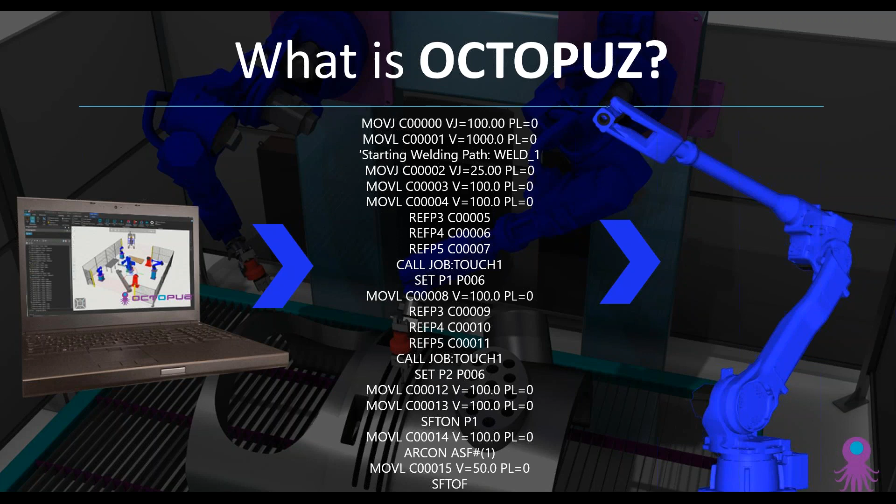Many companies choose Octopuz because of the extensive library of pre-configured components, local support, and the ability to simulate and create code for multiple robots interacting in a single simulation. The amount of time and money that can be saved by avoiding manual robot teaching is substantial.

I will now get into the software and show you the extensive catalog of Yaskawa Motoman components, how easy it is to assemble robotic systems, and finally really dive into the welding functionality available in the software.

As you can see on my screen here, I have now opened the Octopuz software. On the left is our e-catalog of components. This catalog is a web-based catalog that's constantly being updated, so all of these components are being readily developed by our application team as Yaskawa Motoman comes out with new components.

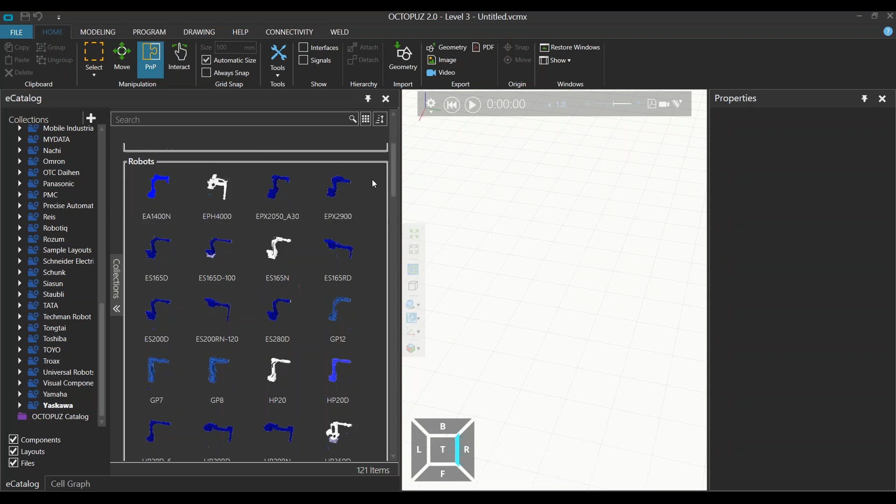As you can see, there's robot positioner gantry systems, a variety of robots from welding to material handling, pick and place, as well as collaborative robots, and workpiece positioners varying from headstock tailstocks, tilt-turn positioners, as well as skyhook positioners.

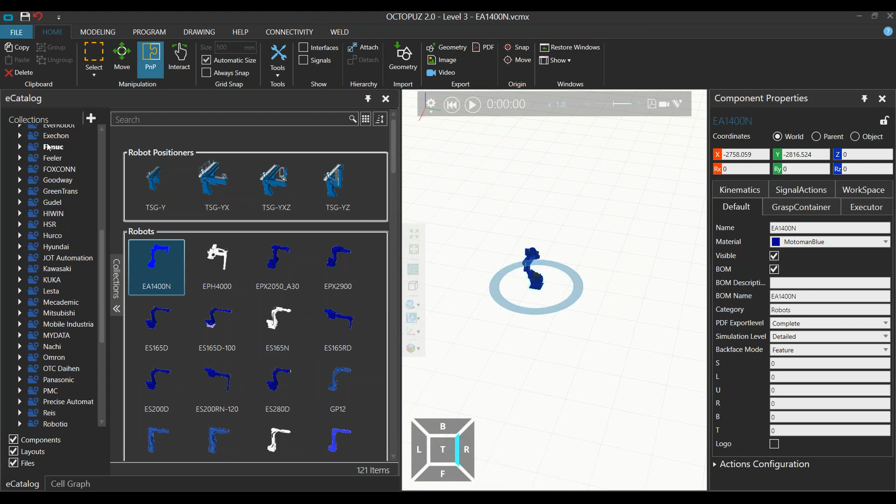So I'll very quickly bring in an EA1400N and attach a torch to it so that you can see how we attach components in our software. Now once you drag components out of the catalog, they come in with all of the correct characteristics. So if I interact with my Motoman robot, it will stop at all the correct joint limits and will interact the way that it would in real life.

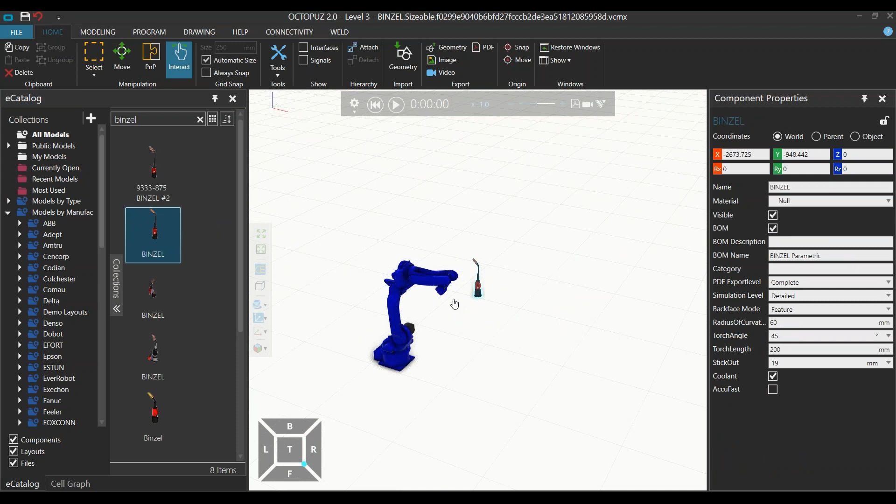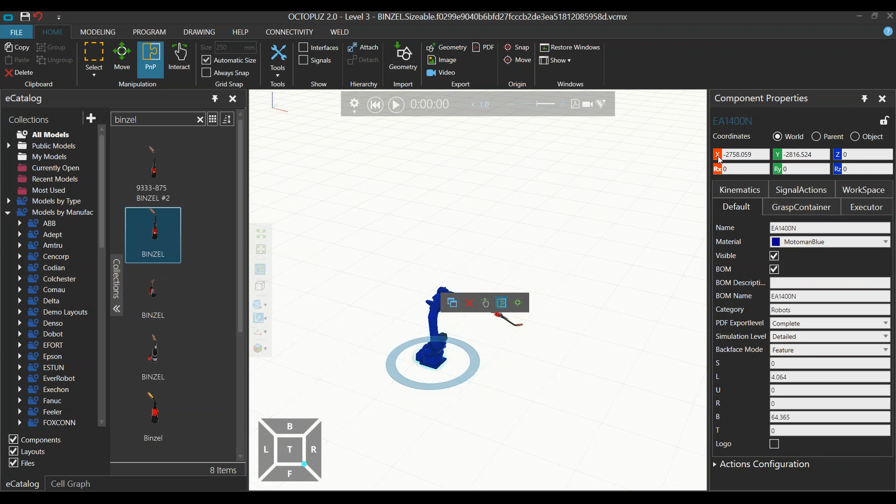If I wanted to connect my torch to my robot, I simply drag it close and it snaps to the end of the arm. Now as you can see, this is a very powerful tool to assemble components. I can also move my components around in the simulation in an XYZ coordinate system and rotate about those axes as well. And this can help me lay out an entire system, including positioners, walls, and a variety of different cell components.

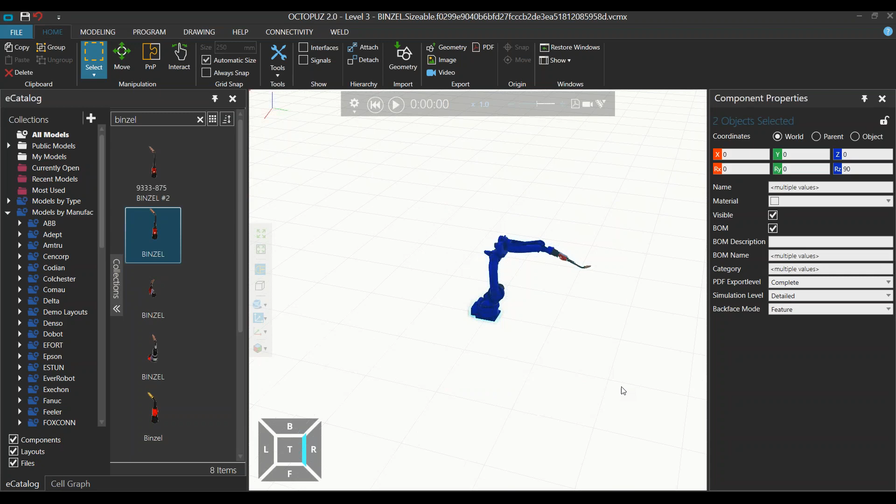So now I'll bring in a cell that we have created for a customer, and I'll go through some of the welding functionality.

All of our welding functionality is housed in this Weld tab. In here, you can do anything from collision detection to singularity, speed, acceleration checks, as well as posting the actual welding code. So what I'll do is I'll start by creating a home position.

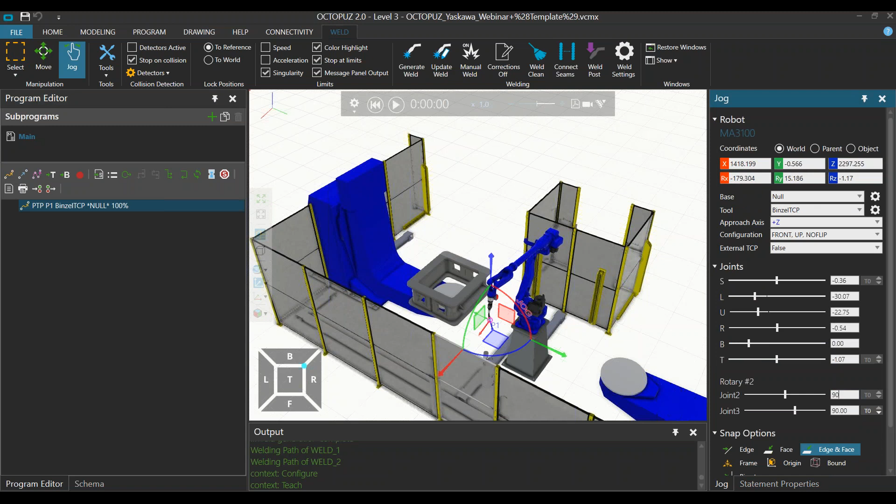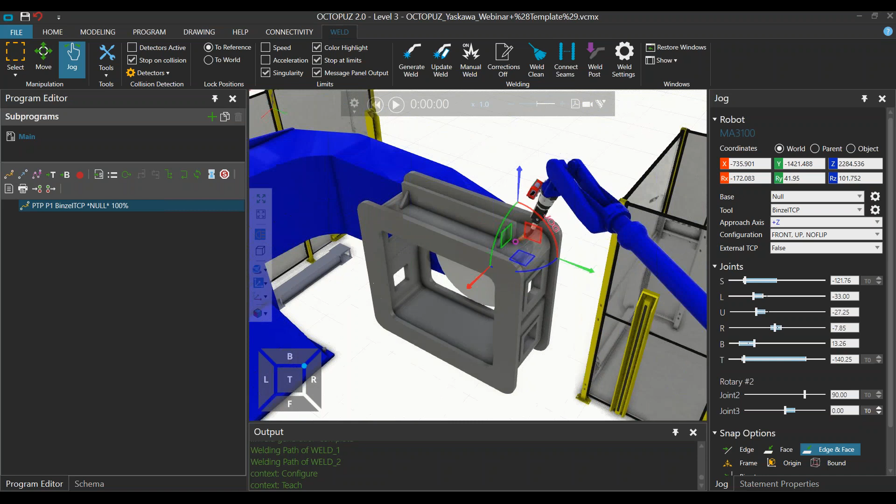I will now index the positioner so that I can access the seam that I would like to weld, and I'll drag my robot over to my component using the purple circle. This allows me to snap to geometries, and then I can grab my blue arc and rotate my torch, and grab the blue arrow and move in the Z direction, and the green arrow to move in the Y direction. And I will use this as a clear position.

Now to generate welds, I simply start the generate weld function, and this will bring up our welding functionality. All of our welding features or parameters would be housed in here, anything from stitch welding, touch sensing, multi-pass welding, or coordinated motion. We can also save and load recipes, and I will load the recipe for my first weld.

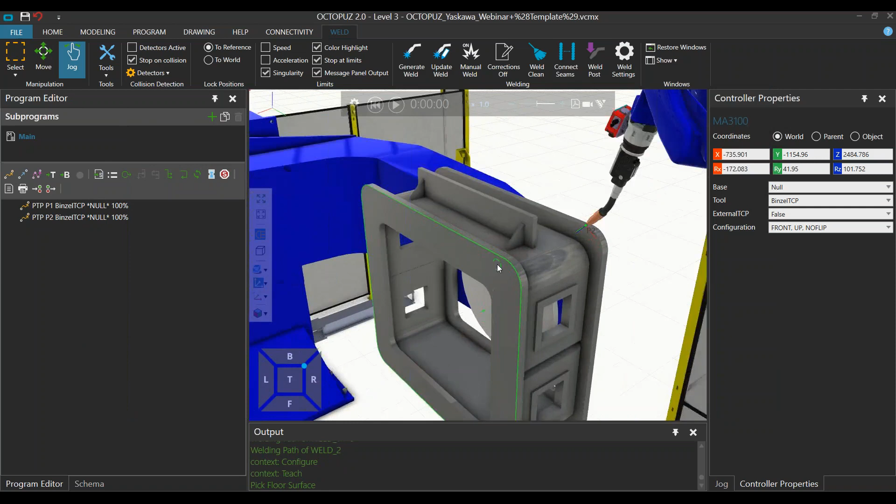So I'm going to create the weld now, and in our software we'll be prompted to select a floor surface as well as a wall surface for our weld seam.

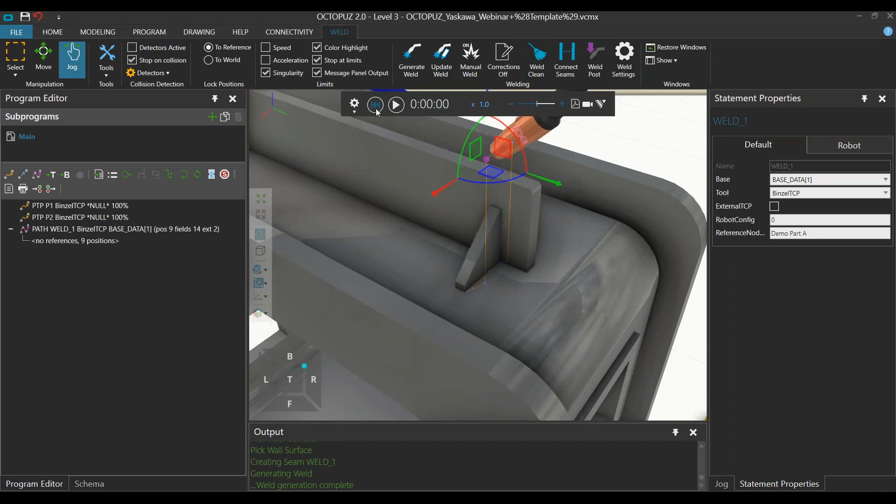As you can see, the software has created an approach as well as a departure move and the variety of clear moves in between. If I simulate through, you can see that the robot's going to move in, weld the seam, and automatically flare into the corner to avoid a collision with the wall.

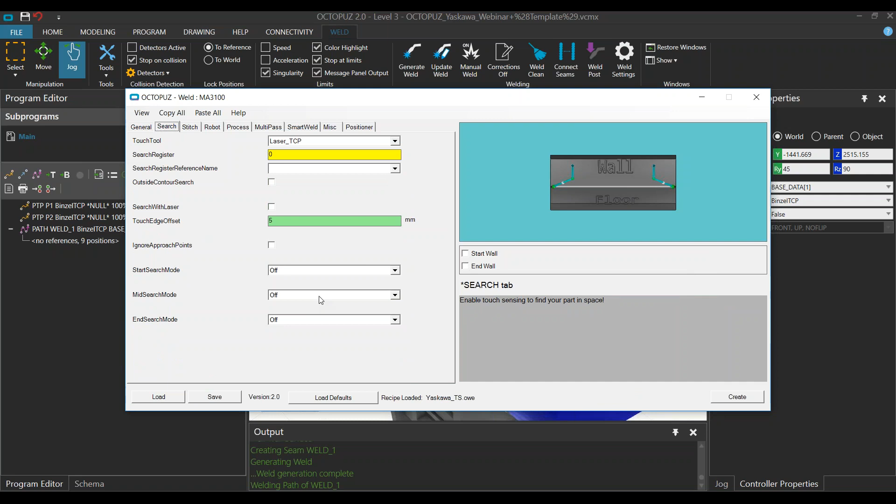Now from here, I'm going to create a weld using laser touch sensing using the AccuFast laser. So I will load my touch sense recipe. In my search tab, I will turn on a 2-point touch at the beginning and a 2-point touch at the end, and again I'm going to select my floor and my wall.

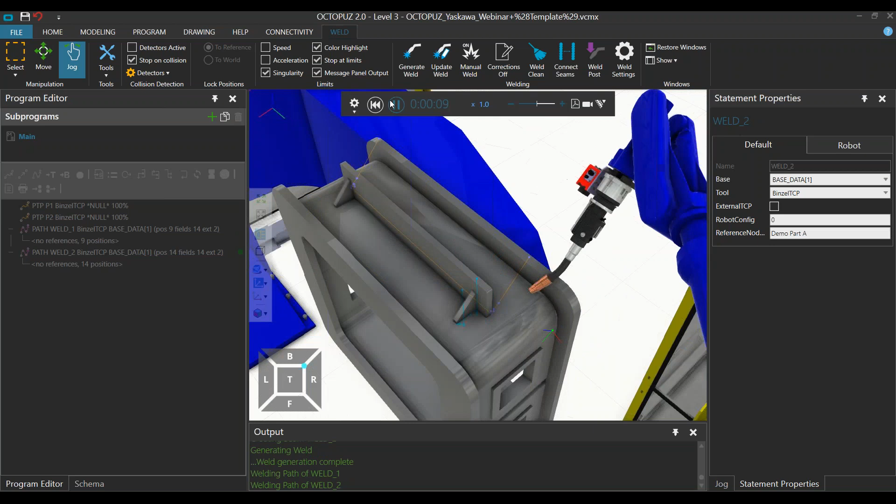And if we simulate through, it's going to weld the first seam and it's going to use my laser tool center point that I didn't turn on. So I'm just going to send my output to the laser to turn the laser on, and then send an output after to turn the laser off.

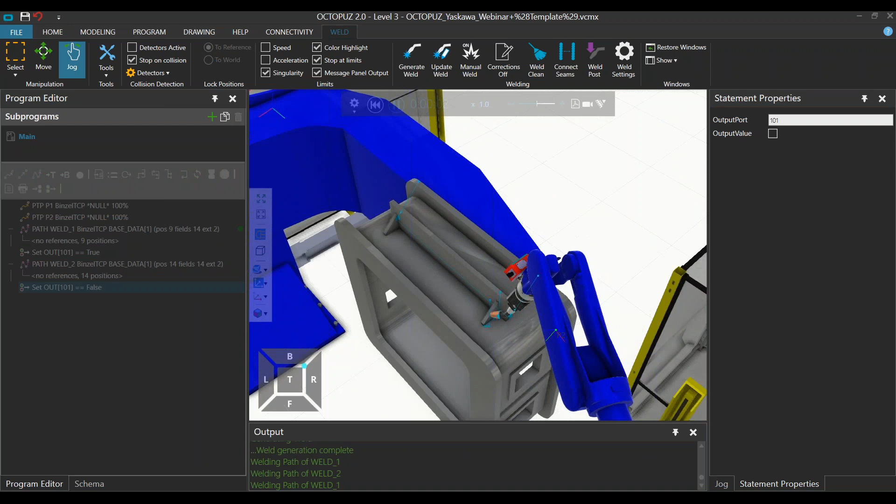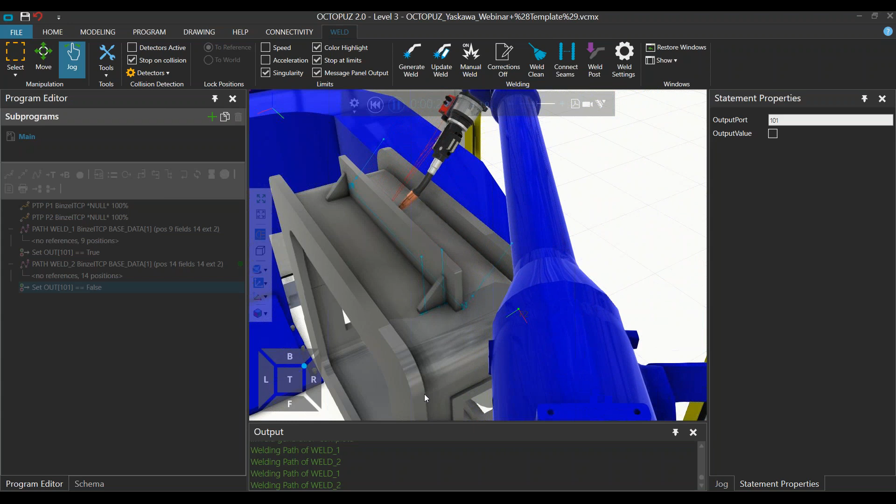Now it'll use the laser for the 2-point touch sense, return to the beginning of the seam, and weld the seam using my correct tool center point.

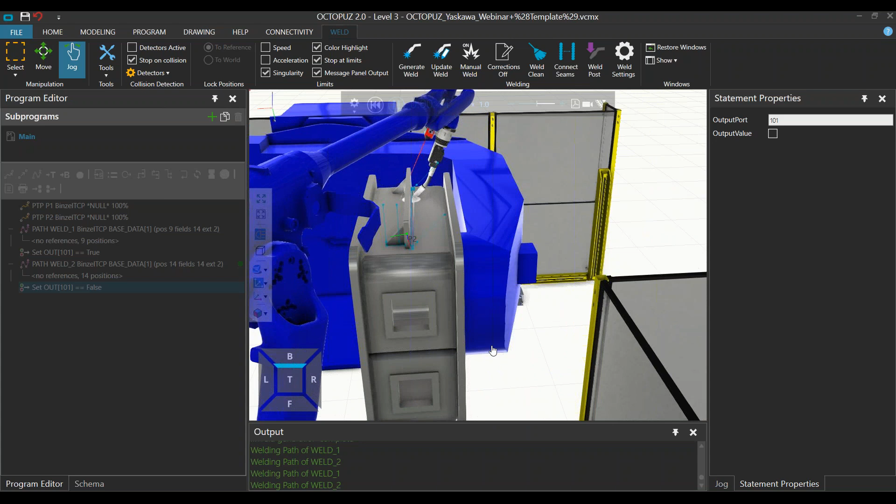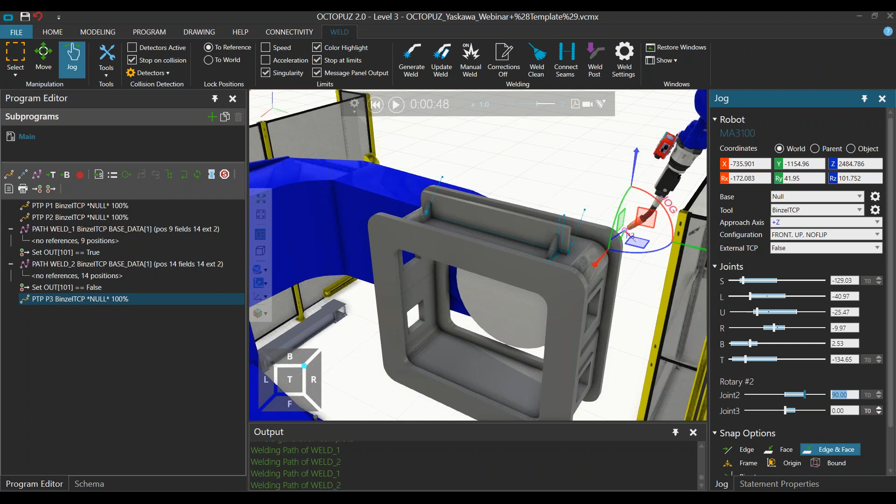Now from here, I'm going to copy my first clear move and drag it down to where I would like it in my program editor. I'm going to rotate my positioner to 90 degrees so that I can access the next seam that I would like to weld and create another point.

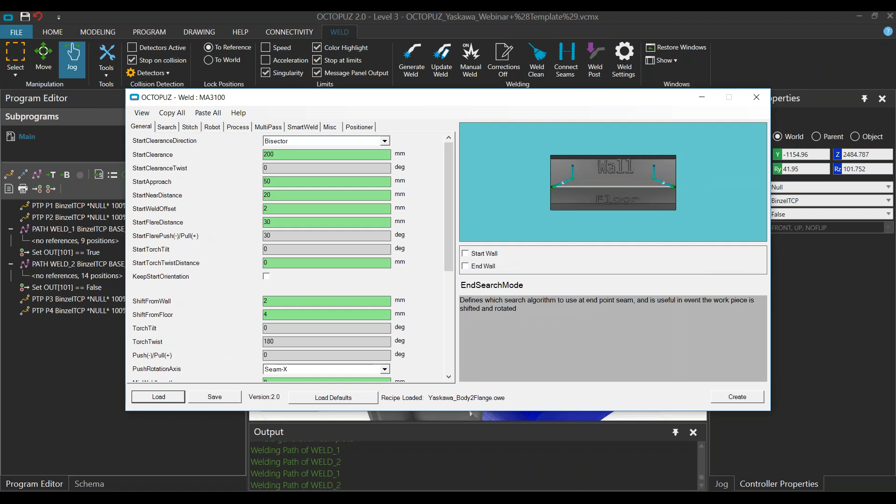From here, I'm going to use my positioner to weld around this seam. So I'll open up my generate weld again, load my recipe for my body to flange, and I'm going to turn on Smart Weld, which allows me to weld around corners. With my positioner, I'm going to set it to width bisector. Now again, I'll select my floor and the wall of my seam, and the robot will create that motion.

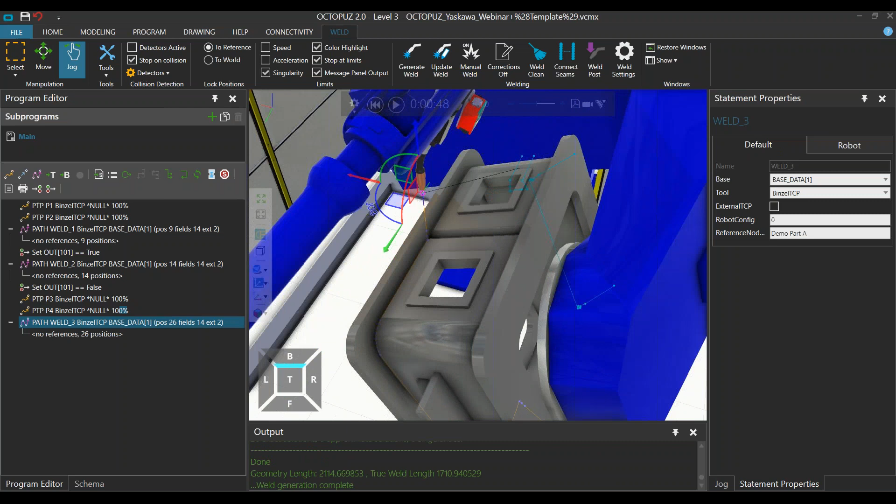If I wanted to walk through to make sure that my robot is going to follow the correct seam that I would like to use, I can walk through each individual point and see that the robot is moving around the corner, as well as using the positioner to position the component.

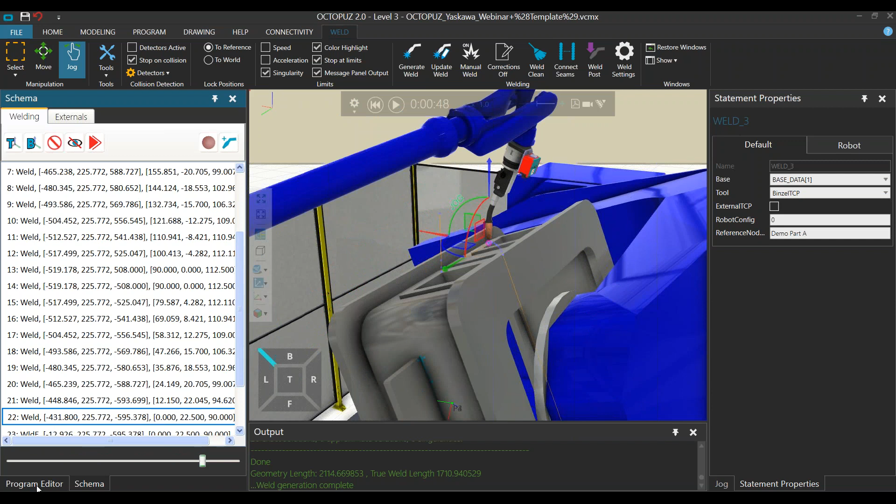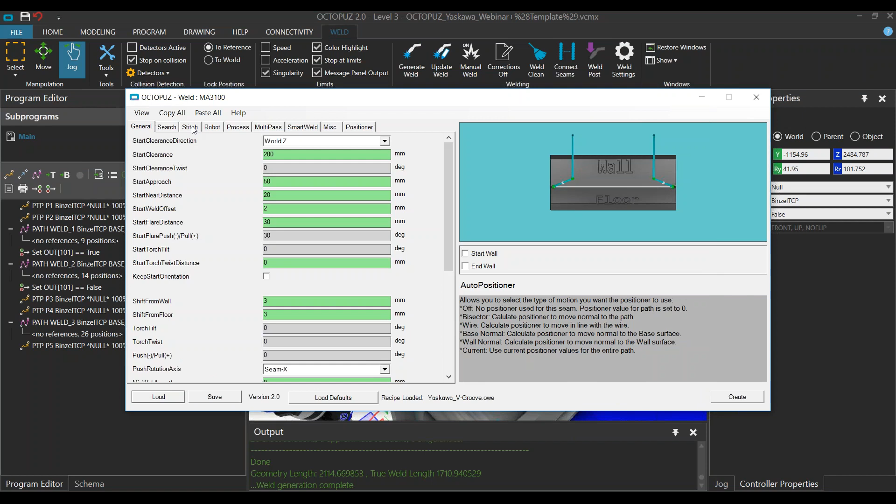After returning to the top, I will now do a V-groove weld using through-arc seam tracking. I'll load that recipe and go to my Process tab and turn on seam tracking, again selecting the floor and the wall of my seam.

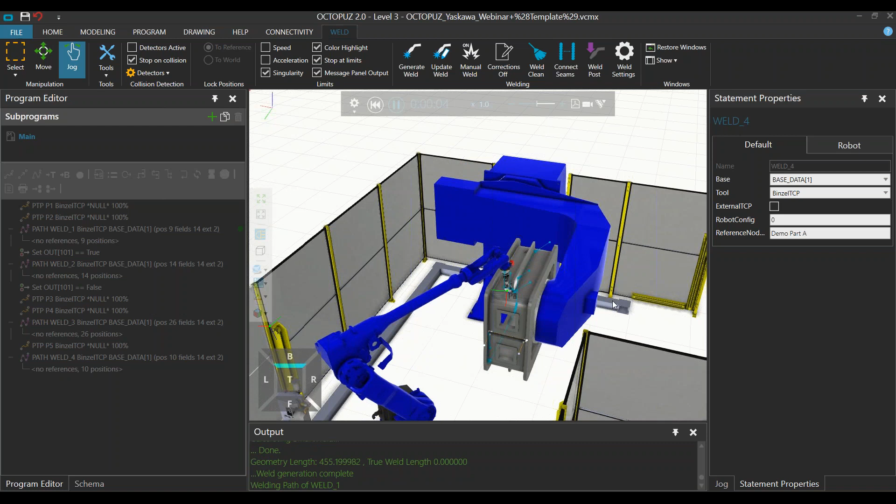And now I'll simulate through the entire process. So the robot will come in, weld the first gusset weld, move around to do the 2-point touch sense, and weld our seam.

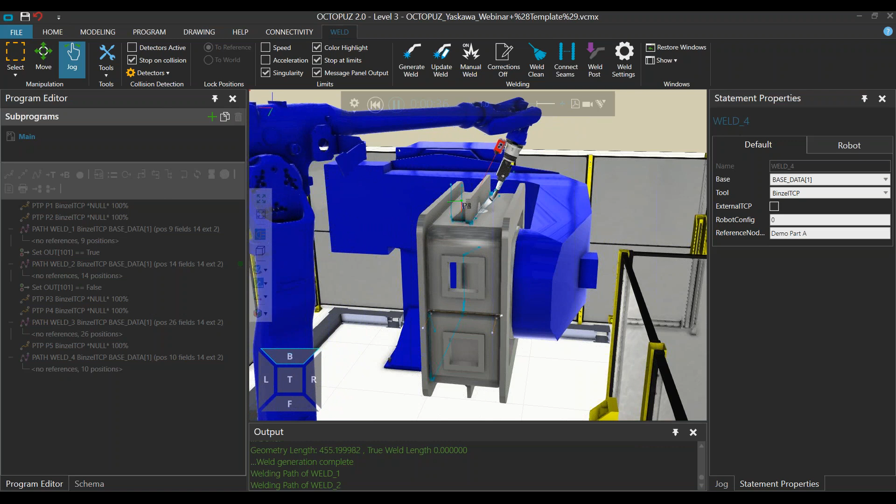Rotate into our 1G welding position, and use my positioner to maintain that orientation.

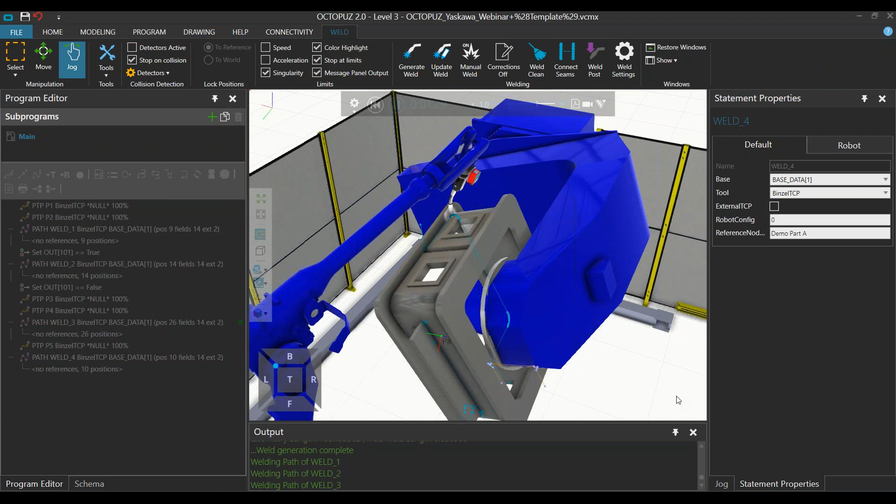And finally, use ComArc through-arc seam tracking to weld my V-groove. As you can see, the weave itself for seam tracking is simulated, so you can accurately see whether or not the nozzle is going to be in contact with the walls of your component. And again, the torch will automatically flare into the end of the seam to avoid a collision with the wall.

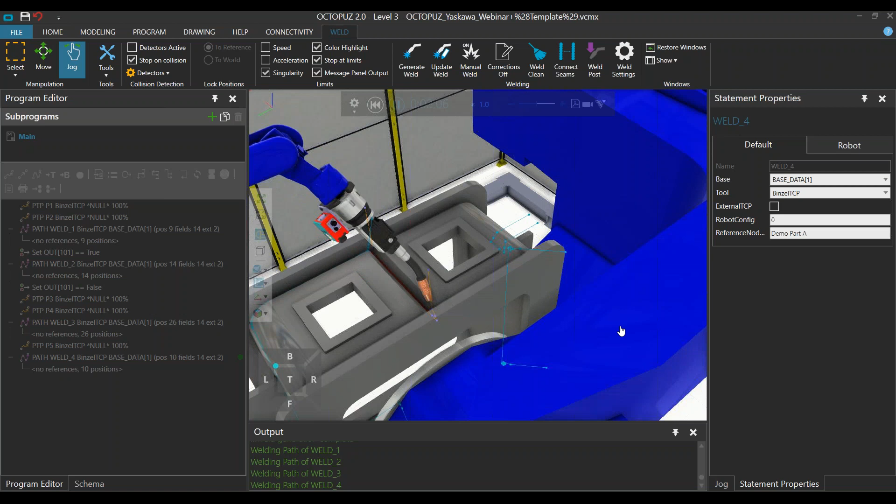I will now pass the presentation over to Will. He will talk to you about some of the seam finding and tracking options available from Yaskawa Motoman.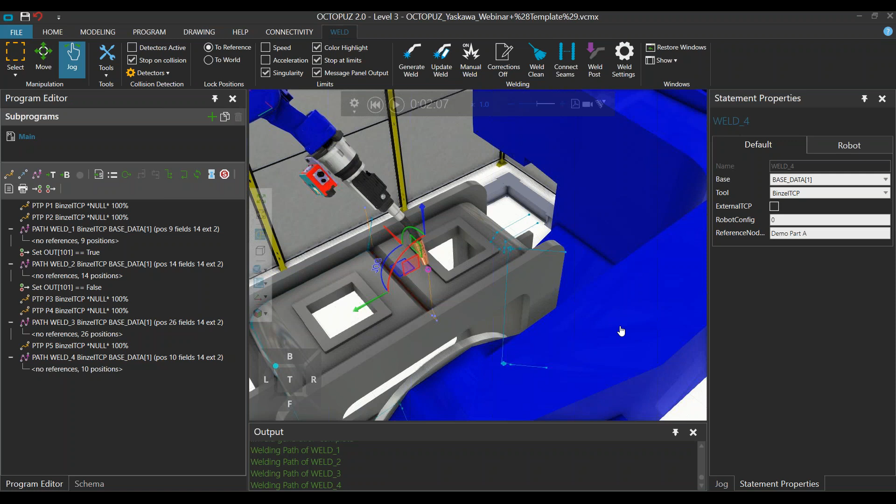As we all know, production parts are never exactly the same as the CAD or drawing. For that reason, it's important to use seam finding and tracking technologies in conjunction with offline programming to overcome the differences from the simulated environment to real production parts.

Okay, well, thank you, Tyler. As Tyler has already alluded to, there's a need to find the part that we've simulated.

Essentially, what Octopuz does is create an offline program that creates everything we need to weld out the part, but it's based on the part model, the virtual part itself. The tacked assembly that we're going to present to the robot will inevitably vary from the model to a degree that the robot won't be able to weld it out. The robot requires that the parts repeat, in essence, plus or minus 20 thou, half a mil, basically half a welding wire diameter, in order to ensure that we're going to successfully do so.

This varies from very simple touch sensing, where we're putting voltage on the wire and jogging the wire towards the part until it grounds out, voltage goes low, and we can determine where the planes of the weld are, all the way to a laser line scanner, the Moto-Eye SF, which does a quick sweep of the joint and determines its geometry and location from that sweep.

Then we'll get into seam tracking. There's two basic technologies available there. The first one, Com-Arc, as Yaskawa Motoman calls it, or across the industry known as through-the-arc seam tracking, where we're taking advantage of constant voltage welding phenomenon to track the joint.

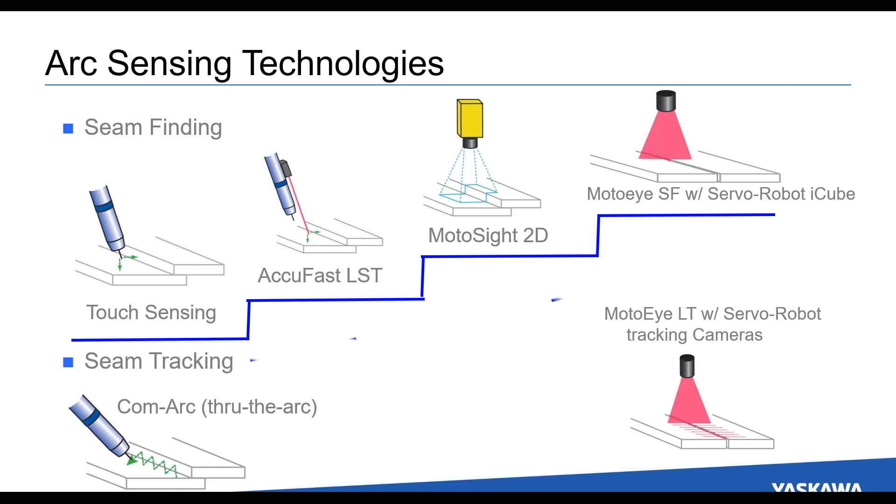So seam finding, we've lumped both touch sensing and what we call AccuFast onto one slide. From the robot's perspective, these are identical in terms of the communication, the I/O required to make both work. It's the sensing technology itself, the transducer, that changes between the two.

Touch sensing has been around for decades. It's a very, very simple, robust process. What we do is we position the robot above, adjacent to the part. We send a signal to the welding system to turn on its touch sensing mode.

All of your modern welding packages, be they from Miller, Lincoln, Fronius, ESAB, whomever, will have a touch sensing circuit that we can access.

What the weld package does is put 80 volts on the MIG welding wire, and now we can jog that wire towards the part. When we make ground, we see the voltage go low, and we found the horizontal plane, for example, in a horizontal fillet.

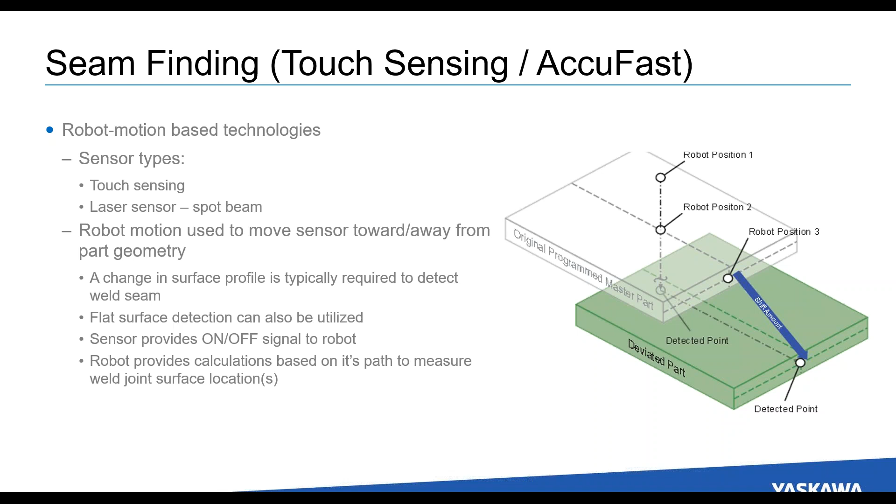We can back up to some point adjacent to the part and jog laterally till we hit the vertical leg of the weld, and interpolate where the origin of the weld is. If you were to do this at the start and finish of the weld and draw a straight line between the two points, you would have found the weld.

So a quick video here of touch sensing in action. What's going to happen here is the robot's going to come down and find the Z-axis dimension of the 12 o'clock point on the large piece of pipe, and then come over and do a couple touches on the nipple before it welds it out.

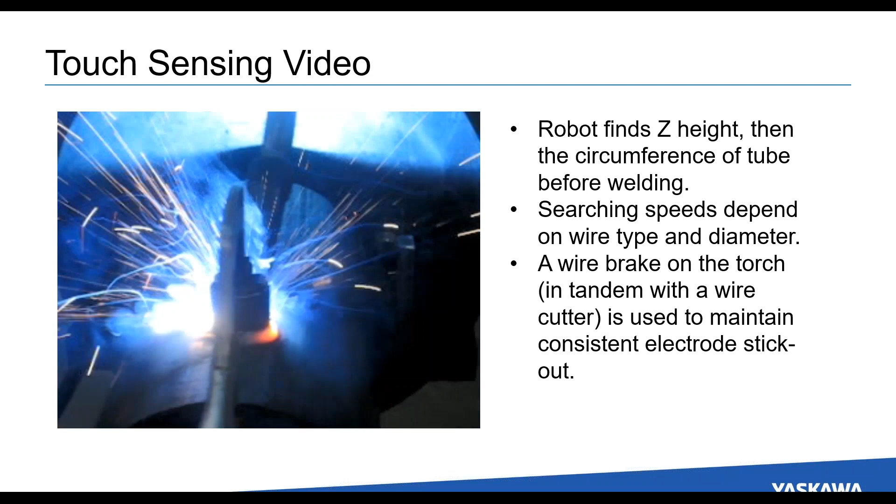So another point made on this slide is there's some hardware we have to package along with touch sensing to make it work effectively. One being what we call a wire brake, a pneumatically actuated plunger that's in the welding torch. Before we go into a touch sensing mode, we activate this brake.

What it does is it prevents the MIG wire from cycling in and out of the contact tip and moving around on us as we move the robot.

Once we've braked the wire, we go over to what's called a wire cutter and clip the wire to a known stick-out. So the distance from the end of the contact tip to the end of the wire is known, and with that, we can do reliable touch sensing routines.

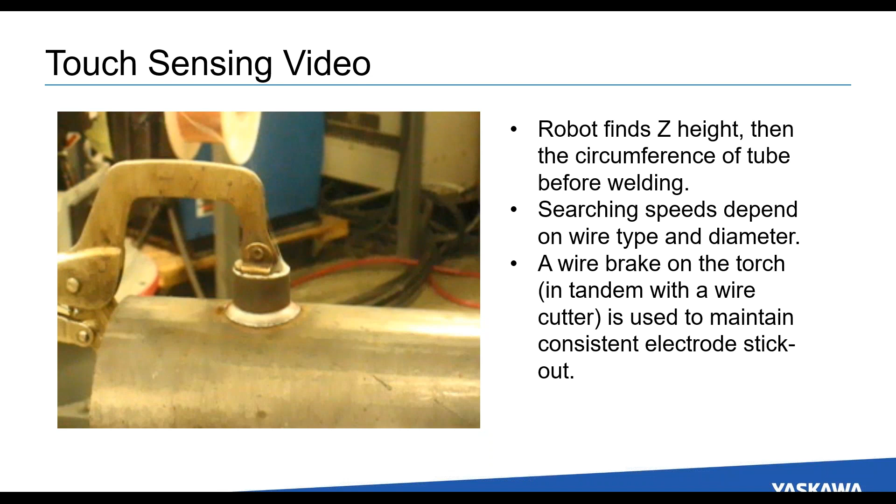So AccuFast, again, from a control standpoint, is the same thing as touch sensing. What changes here is the transducer, the way in which we're finding the surface of the part. Here we've gotten rid of using the weld wire with voltage on it and replaced it with a spot laser. We set up a predetermined focal length.

Again, we jog the robot from a nominal position above the part towards the part. When the focal length is met, we can see that signal go high, and we know that we found the plane of the weld.

So we do that for both a horizontal and vertical leg in the case of a fillet or a lap weld, and carry on the same way we would with touch sensing.

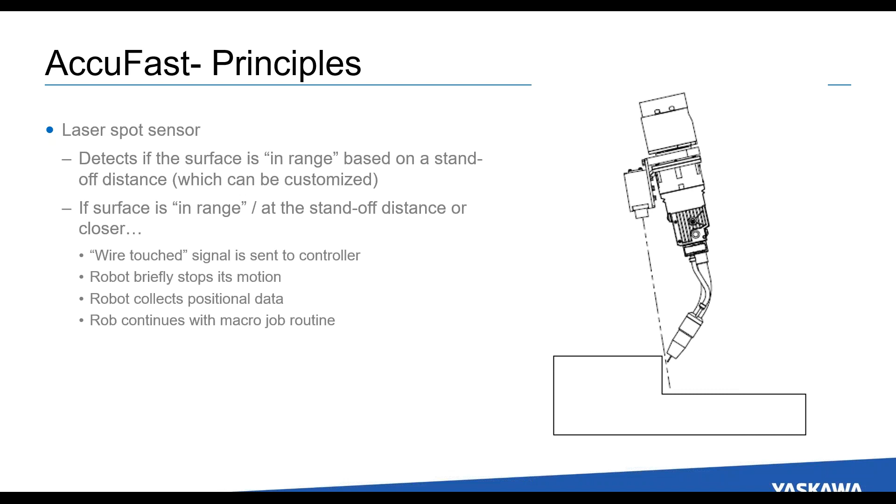So the hardware involved here is the whole thing is based upon a Keyence spot laser. We put it in a hardened enclosure with a pneumatically actuated flapper that we can close to protect the emitter and receiver of the laser while we're welding, keeping all the soot and spatter and whatnot off of it.

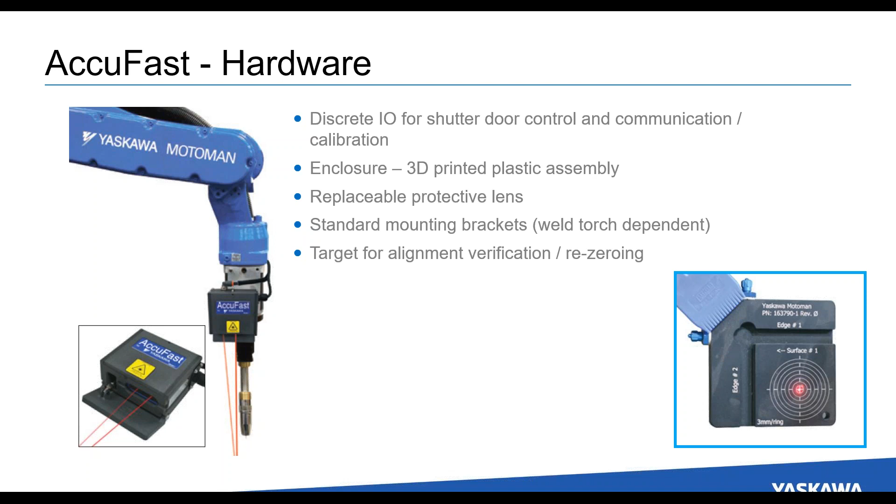Quick video of AccuFast at work. You're going to see two things happening here. The robot is first going to scan the back edge of the part and the left edge of the part. The part has not been fixtured to the table it's sitting on; it's been placed nominally, so the robot's going to do a sort of macro location of where the part is at.

And then it will do a function we call relative job, where it will shift and rotate all the points in its program to match this revised position. Then the robot will swing around and do an AccuFast tracking of the front of the part, and then do a mock weld of the part.

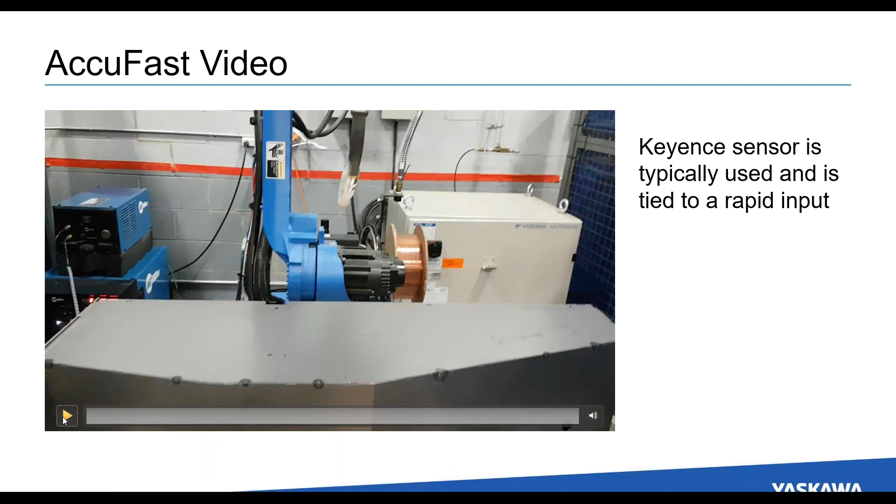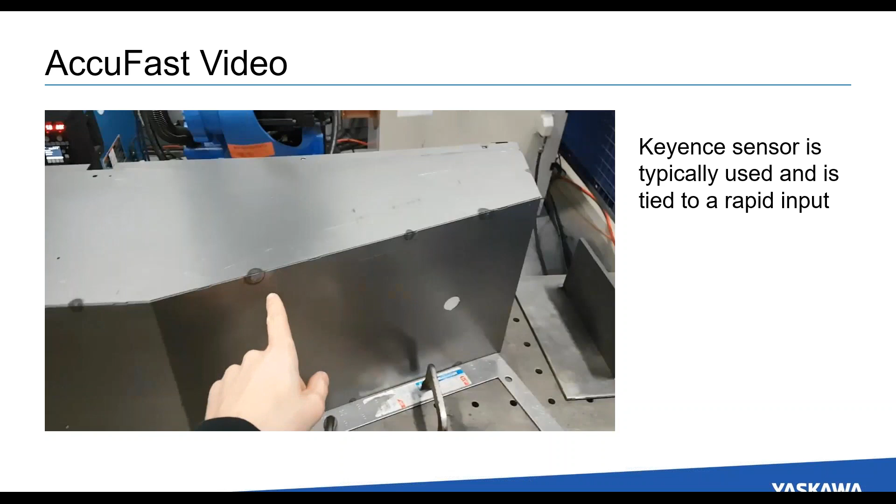This is an AccuFast demo for C&P. Going to be tracking this weld seam here. This is how the part's set up.

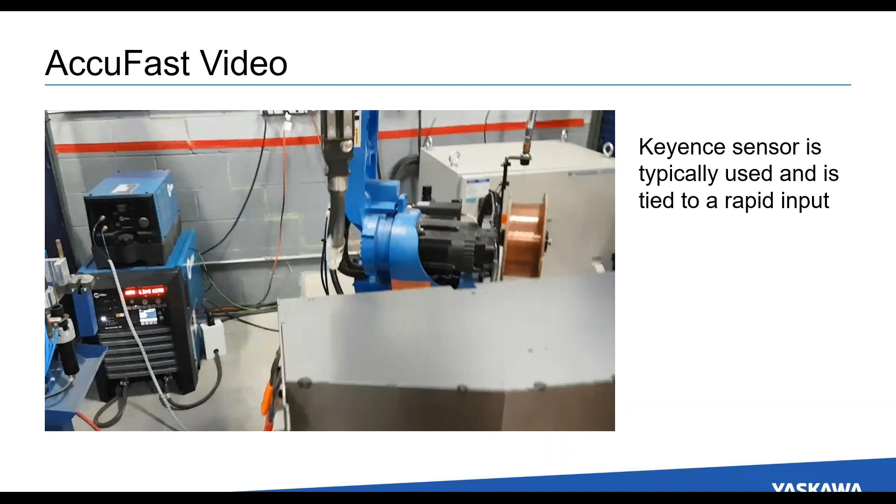The robot first finds the user frame using relative job.

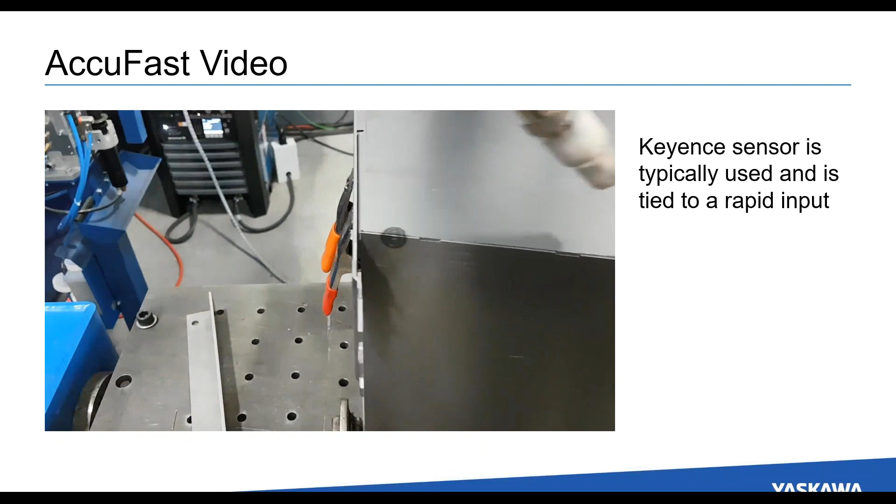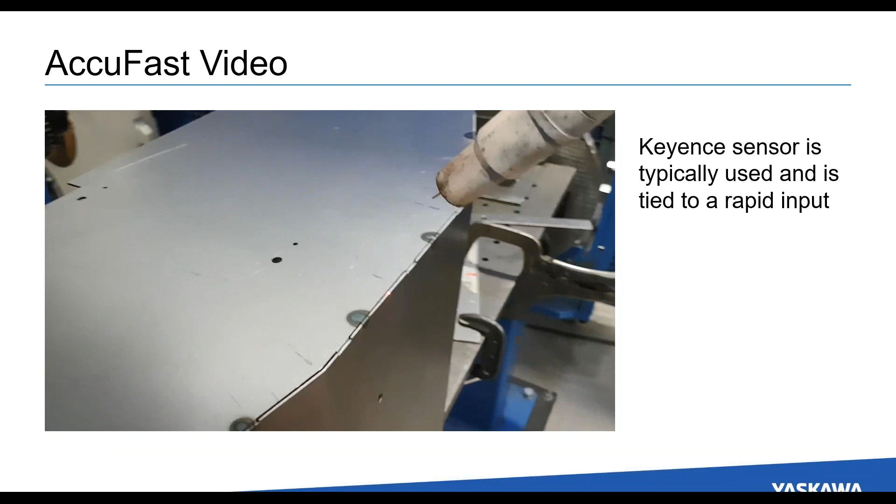Then using the edge macro to find Y. Then another edge macro to find X and Z. And then they're going to shift off of that user frame.

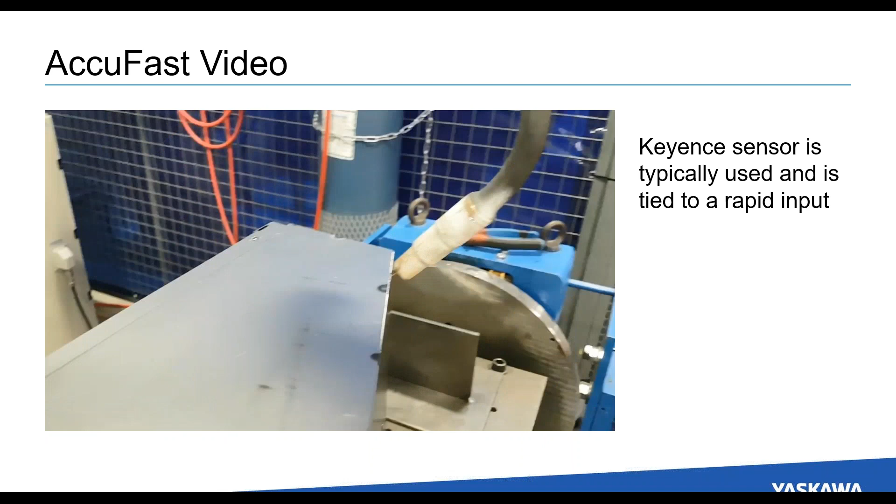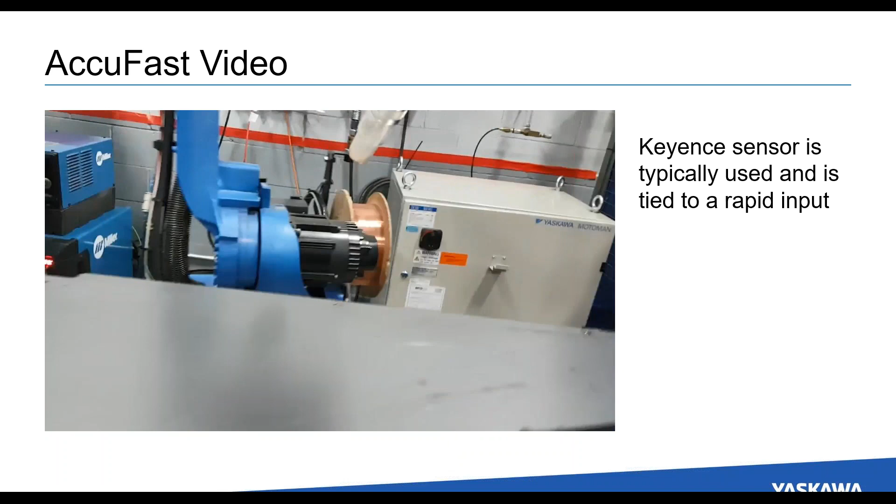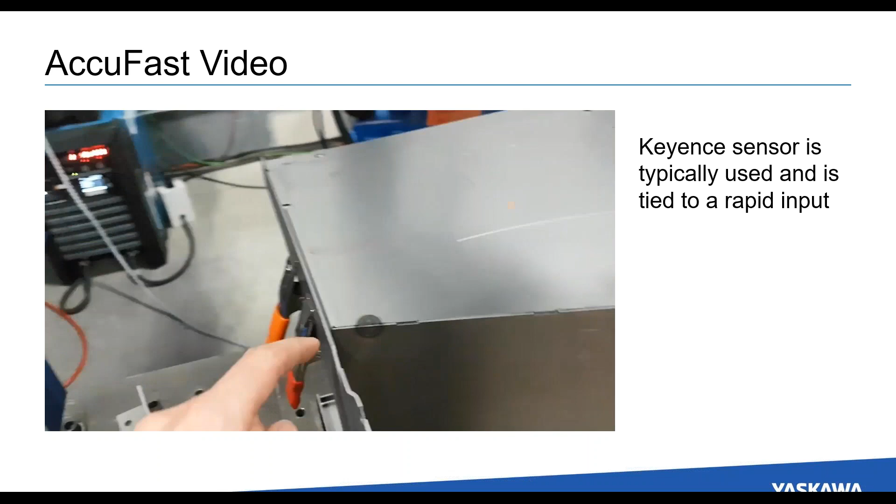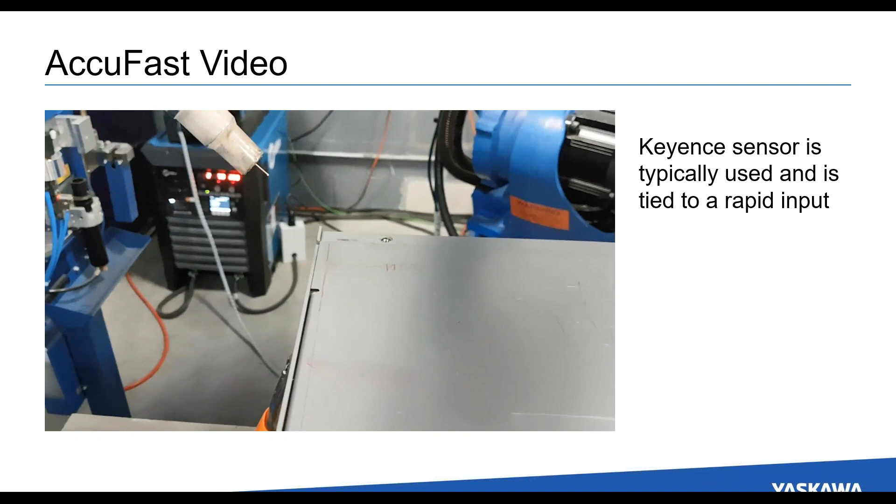Then I'm going to pause the program, and I'm going to move the part. I'm actually going to rotate it, twist it a little bit. Okay, run it again. Finding another user frame. I had to put this piece on here because I wasn't searching this bevel very well. Edge macro again, finding Y, and another one finding X and Z.

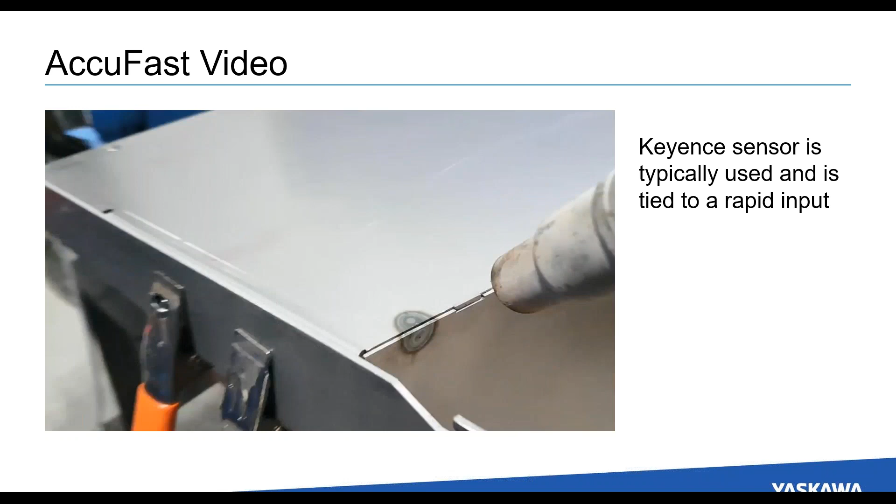Okay, so we get the idea there.

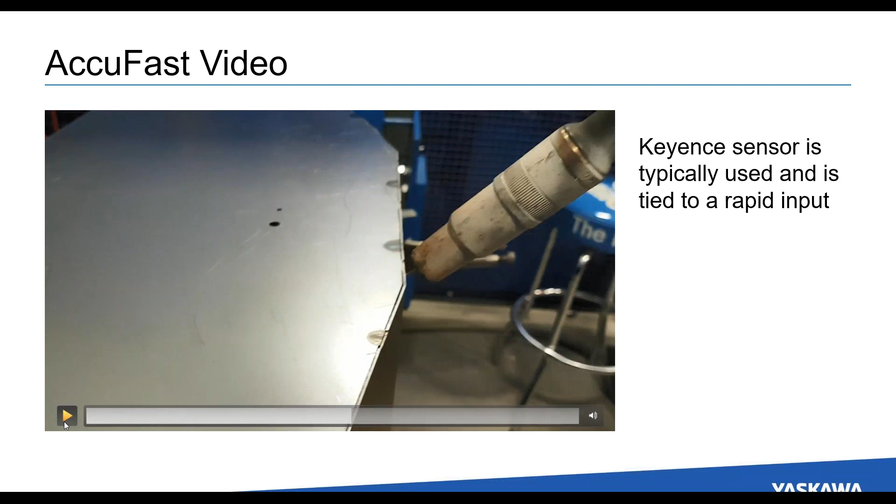So to compare the two, touch sensing, positives of that, it's a very low cost adder to the robot package. We generally charge $3,000 US for that to be added to the basic robot package. Very reliable, very easy to program. We've been doing this for decades.

Our techs understand it very well, and it's very easy to explain to our customers how to set them up. The difficulties with it is it's typically slower, one of the slower finding technologies because we have to move slowly. If we move too fast, we'll end up bending the wire, losing our tool center point, and defeating the whole purpose of doing the seam finding.

The wire clipping that's involved to cut to a known length also chews up cycle time. So AccuFast, by definition, was developed to be a faster alternative to touch sensing. So the positives of that are we no longer have to clip any wire because we're not using it.

It's very easy to program. It programs more or less the same way as touch sensing programs. We can actually do our search routines much quicker because we don't have to worry about bending a wire. We can also handle thinner material. So in a lap weld, very difficult to pick that up with touch sensing, but AccuFast has a much better chance of picking it up.

I guess the cons of it are that we would charge about $6,000 as an adder price for the AccuFast, and it can be sensitive when using super reflective, highly reflective materials, polished stainless, aluminum, whatnot.

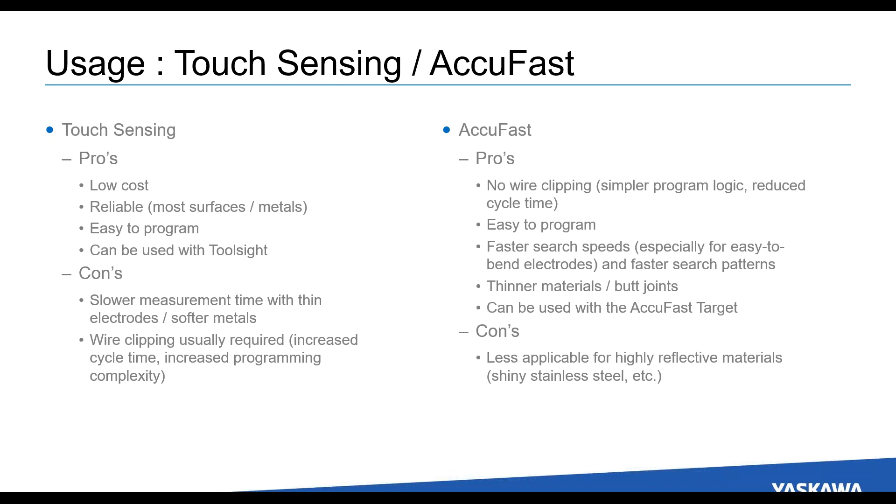MotoSight 2D. We haven't done a whole lot with this, but if we have a type of weldment where we can't pick it up through normal touch sensing, then it is possible to use a conventional two-dimensional camera, take an image, and then determine where to weld. Expanded metal is a great example of this. So the camera will be tuned to take the image and then be able to determine where we want to put our tacks on the part. Here's a quick video of that.

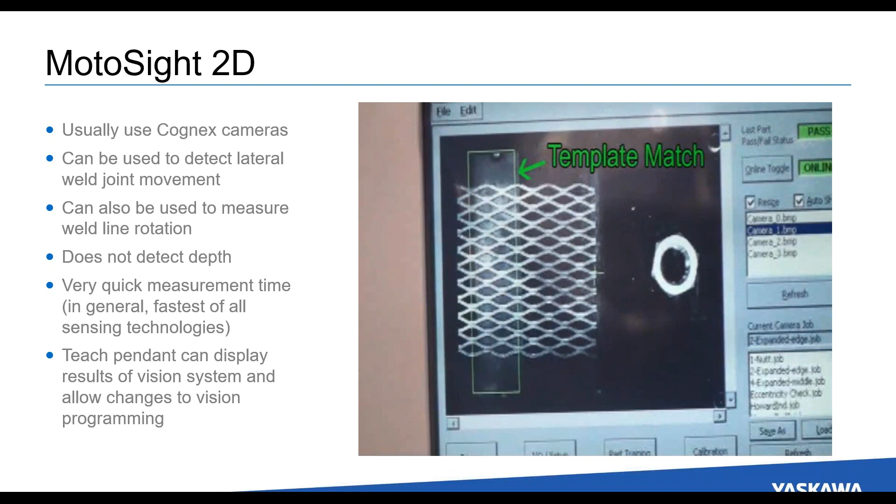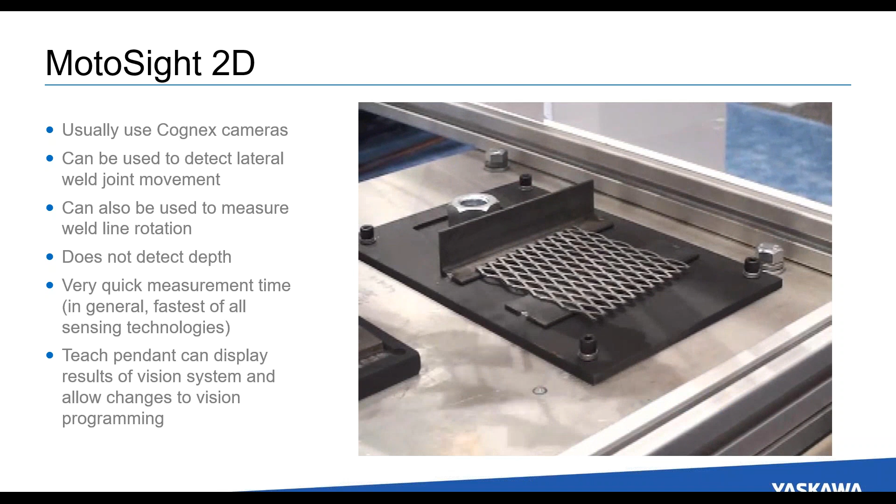Okay, the last of our seam finding technologies is from a company called Servo Robot out of Quebec. These guys are recognized as the global leader in what they do. They've been around for many decades now, developing their products. Motoeye SF, or Motoeye Seam Finder, is essentially a laser line scan.

The advantage here is that we can position the robot once over the start of the weld, perhaps once over the end of the weld, and take a quick laser line scan. It avoids having to move the robot around to actually trip a sensor to find out where the part is at. This is more capital, however. We typically charge $20,000 US to add this to the robot package. So if you can get away with your conventional touch sensing systems, that's what we usually go with.

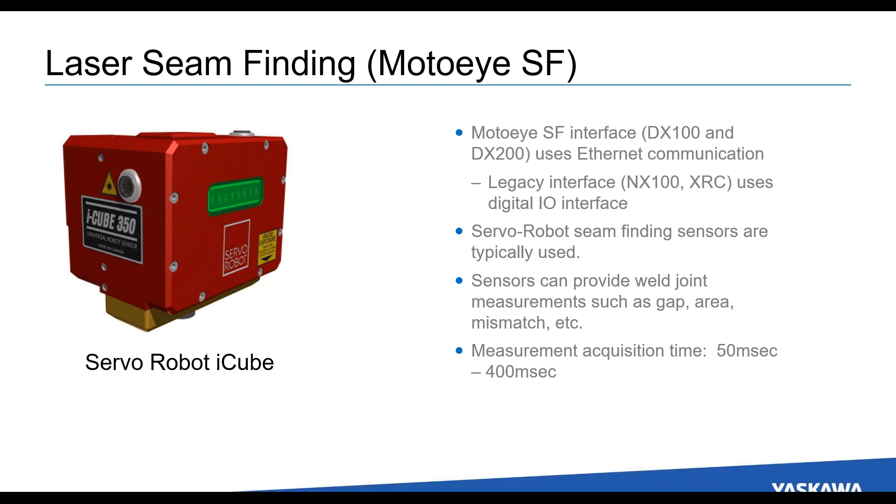The iCube is the high end of all of that. Quick video of it, there we go.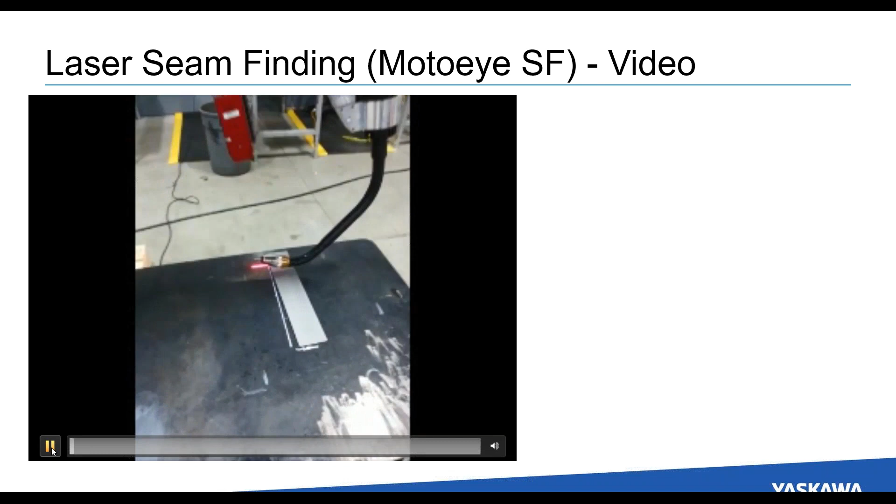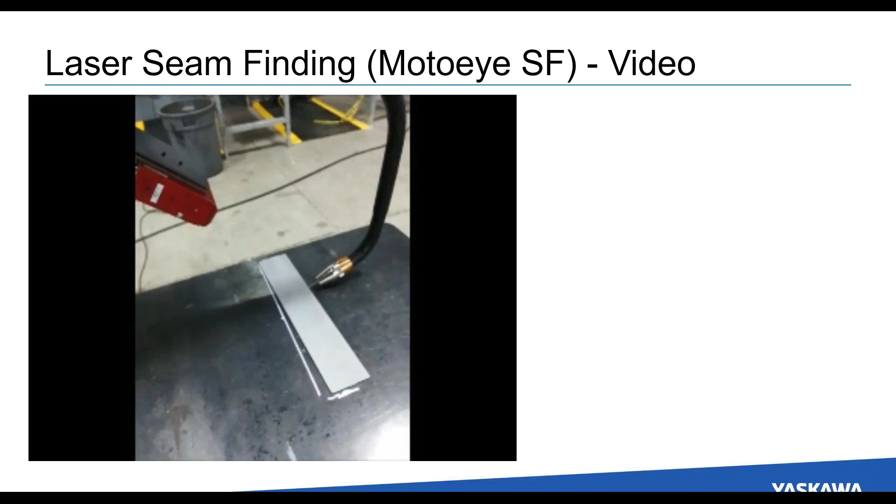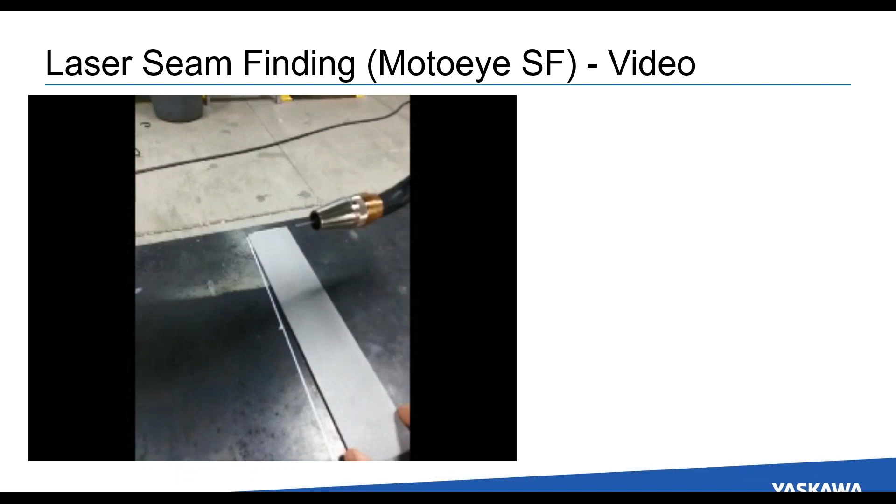So you can see in this video that the searching routine was much quicker even than the AccuFast that was being shown in the previous video. It does pick up cycle time, so it's a question of capital versus how much cycle time you wish to achieve.

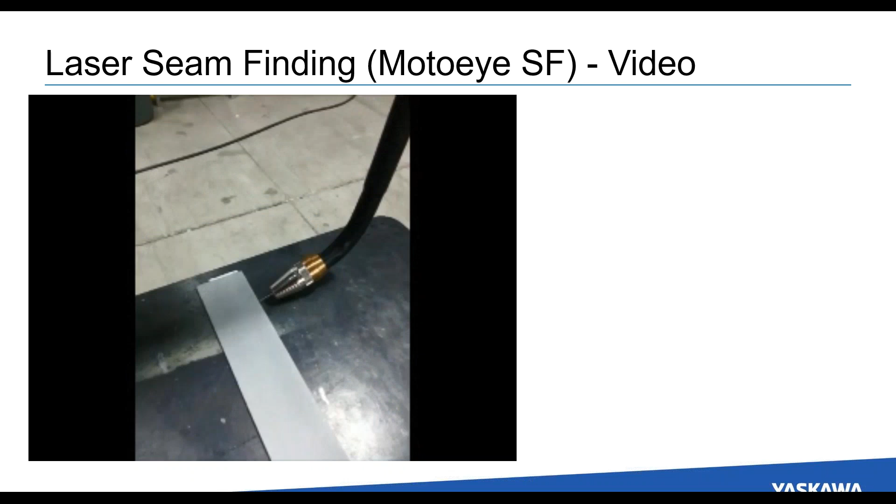So everything we've talked about so far is about seam finding—in other words, before we initiate the arc, before we start our weld, trying to find the weld joint. We do find that even doing that there is a requirement to, in real time while we're welding, track the joint. That could be because what's supposed to be a straight weld isn't in fact a straight weld due to part variance, or it could be a result of weld distortion. As we weld, the part begins to move, but we need to track the joint as it moves.

There are two basic technologies for this, the first being ComArc, or through-the-arc seam tracking. Again, this has been around for decades. It takes advantage of the constant voltage MIG welding phenomenon: as we reduce stick out—the distance between the contact tip and the work—with everything else kept the same, current will rise. So what we do is take a current feedback from the welding package, and much like the touch sensing circuit, every modern welding power source set up for robotics will have the ability to give us current feedback in real time, whether it's a Miller, a Lincoln, a Fronius, an ESAB, what have you.

So what we do is start our weld and deliberately weave the torch in the joint. As we step off the center line of the joint and get to both toes of the weld, the stick out shortens and we see a current rise. As we monitor that current relative to the robot position as we sweep back and forth across the joint, we can continually update the path as to where the center line of that joint is and effectively walk down the joint.

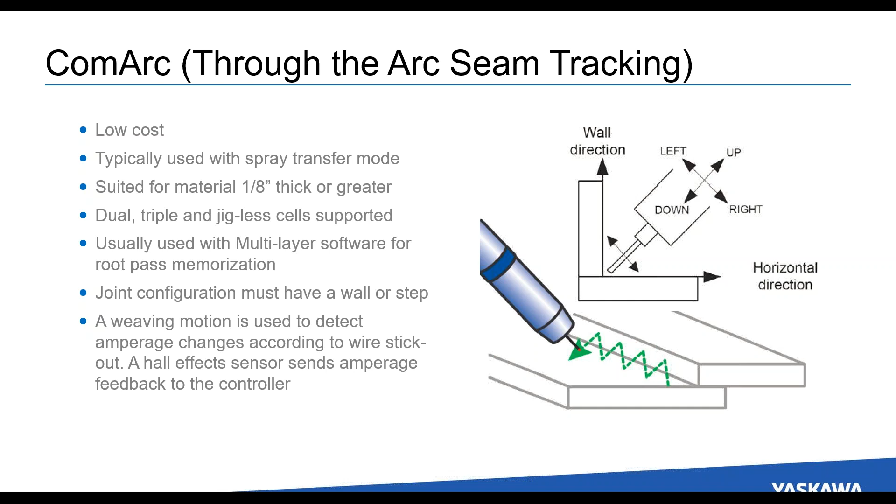Quick video of ComArc in action. So the weave is almost imperceptible, but it is necessary in order for us to see the current deltas as we move down the joint.

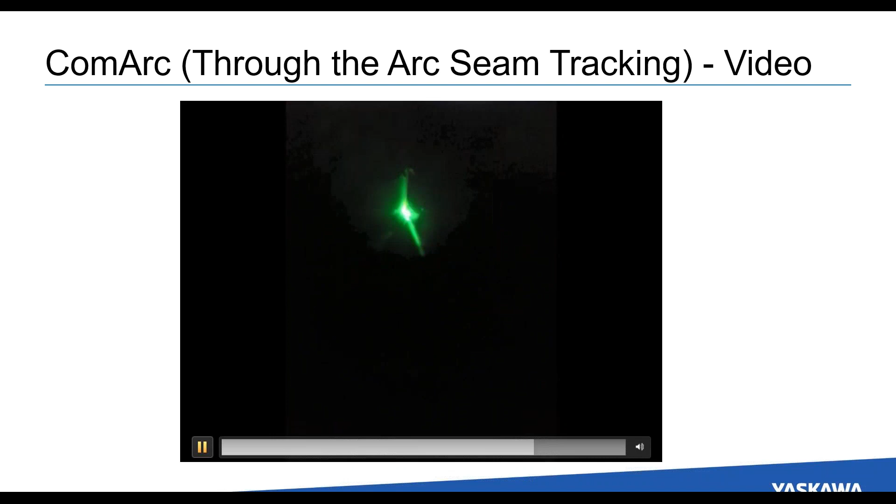And there you go. So we could continuously move that part around within obviously a window. As long as we can find the origin of the joint using touch sensing, we'd be able to have the robot adjust its path no matter what angle we put that fillet weld on.

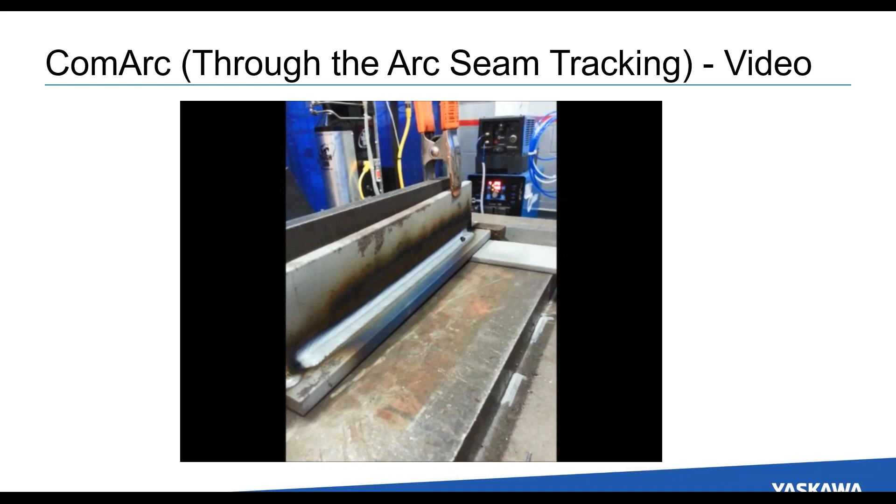So the last technology we'll talk about today is what we call laser seam tracking. This is seam tracking with the arc lit. The laser basically scans the joint ahead of the arc. What makes this difficult is trying to do a laser scan and get good clean feedback from where the part is at while the arc is lit.

Again, this is a solution that comes from Servo Robot. This is really the cornerstone of their whole operation, and what they've been developing over the last 20, 30 years is tuning a laser to be able to filter out the pollution, the noise that comes off of the arc—determining the proper wavelengths, the proper frequencies of light to use for the laser so that it's not as susceptible to the arc.

But it allows us a lot of flexibility in terms of what joints we can track. You basically program the laser system to know what kind of joint it's looking for. We can look at gap conditions, understand how well the part's been tacked together. If we need to slow the robot down to make up for a volume difference, or increase wire speed to make up for a volume difference in a joint, all of that can be tied into the system.

So that's pretty much for my presentation. Anything else to add, Tyler? Anything else to wrap it up? I think that's pretty good. We covered how to do things offline, how to create your path, and the reasons that you need to do seam finding and seam tracking once you've created that production part.